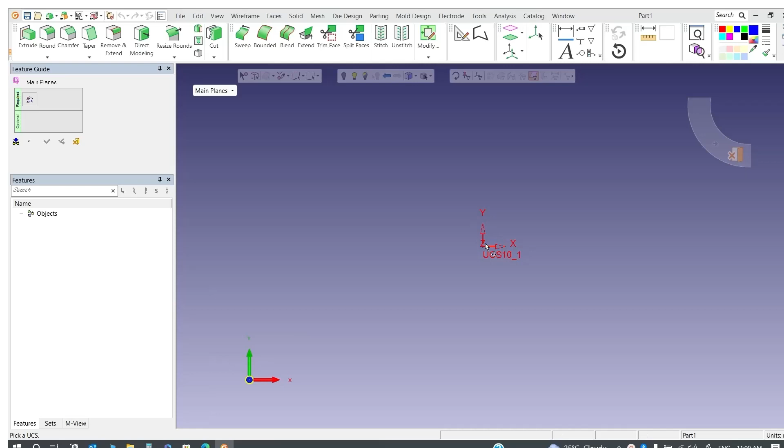So in plane, if you are creating plane, you have to create a main UCS. How will we create it? In wireframe, we have an option called main planes. While selecting the main planes, it asks to pick a UCS. We will select this default UCS, and you can create XYZ planes. Otherwise, if you want only the XY plane, you can select only that, or you can go for the default main planes. If you select OK, you will get the XYZ planes.

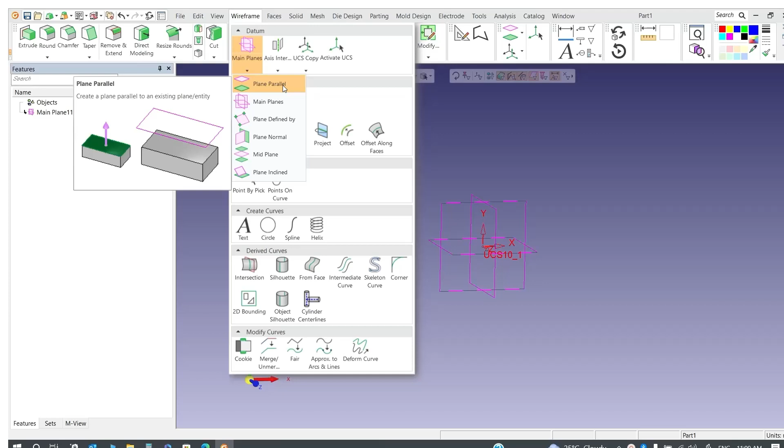The second one is plane parallel. If you want to create a plane parallel to a plane or surface, you can use this option. It asks you to pick the entity to define the plane. I will select this XY plane. Otherwise, if you have any solid object, you can select any face as well. Just select the plane, then it asks for the delta.

You can toggle this vector, and I will take this upside as 500. Now it's on one side. If you want to create on both sides, you can go for both sides. Here also you can give the dimensions. I'll reduce it to 200, so I will give 200 here.

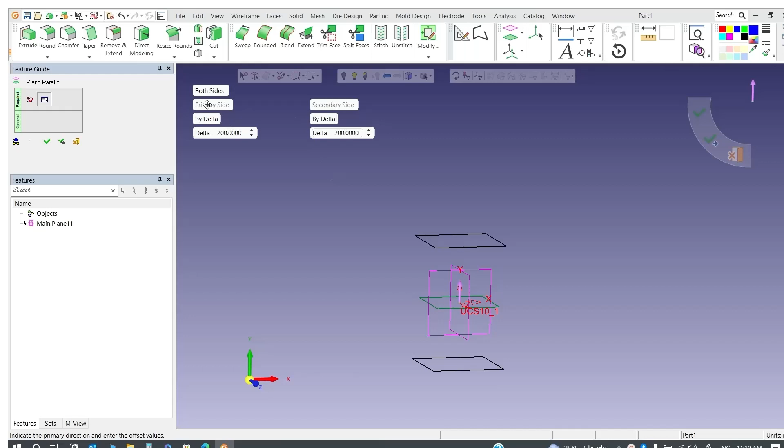The next option is, if you don't want a delta dimension but have a specific point, you can select by point instead of delta. There you can select the specific point, so the plane will be created at that particular point. That's how we can create a plane parallel.

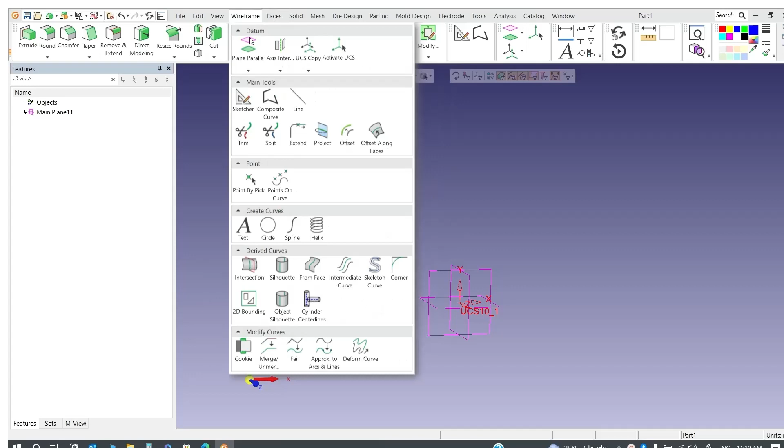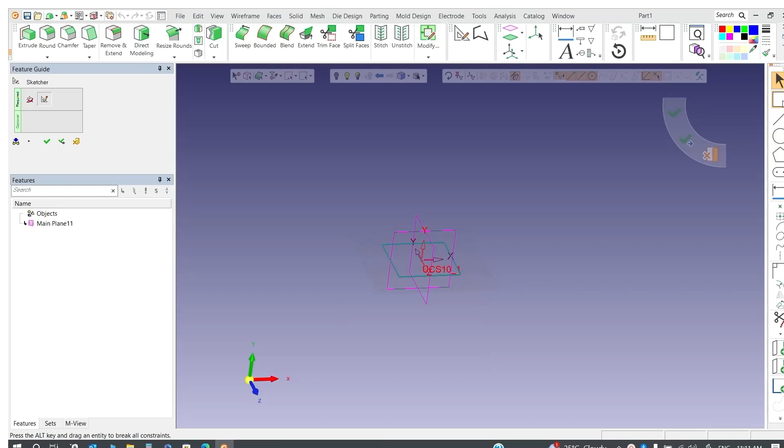The next one will be main plane, which we already discussed. The next is plane defined by points. For that purpose, I will create a solid object, then I will delete this main plane as well.

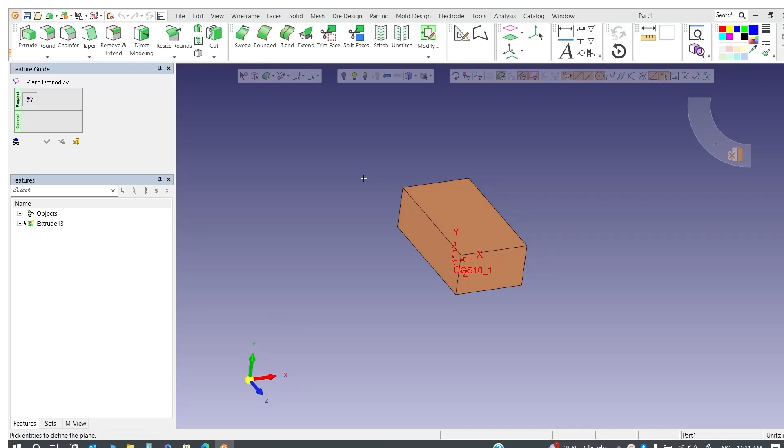Here you want to create a plane using 3 different points - plane defined by points. I will select the plane defined by; it asks for the entity to define the plane. I will select the first point, then this point, then this point. It will create a plane with respect to these 3 points.

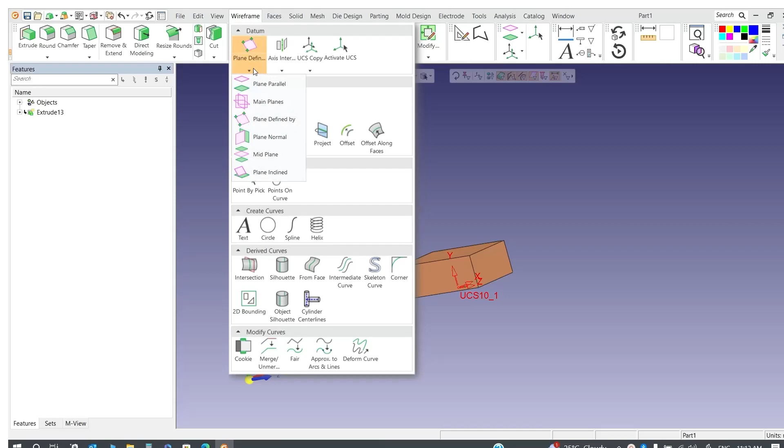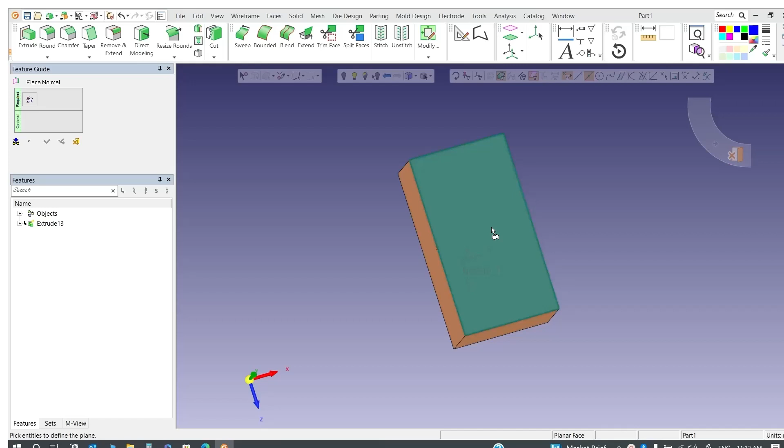Then plane normal - if you want to create a plane on these 2 points, the middle of this object, I select this face first, then it asks for 2 points. I will use this filter option to select the center point, so I'll select these 2 objects. You will get a plane horizontally, vertically, 90 degrees with this plane. That is plane normal.

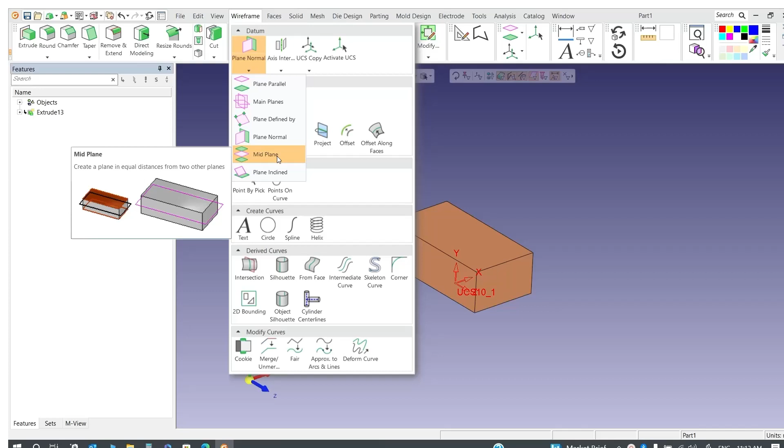The fifth one is mid plane. Mid plane means if you want to create a plane in the middle of 2 surfaces, I will select the first surface and second surface, and you can create a plane in the middle of these two surfaces. Like this, I will select these two planes and it will create a plane in the middle of the object - that's two different ones.

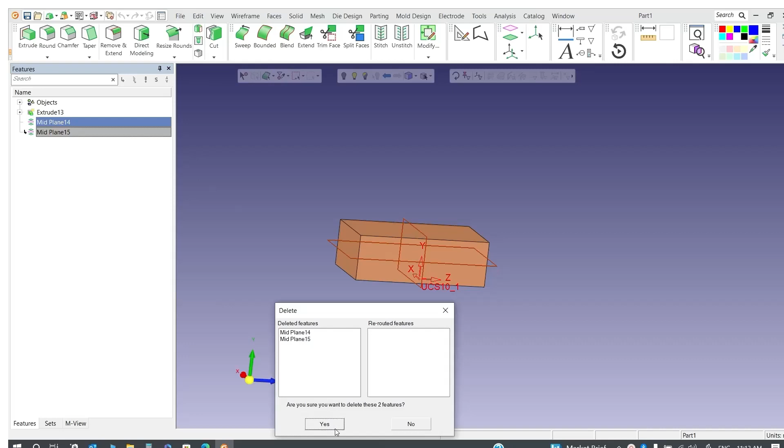These are the different types of plane creation in Cimatron.

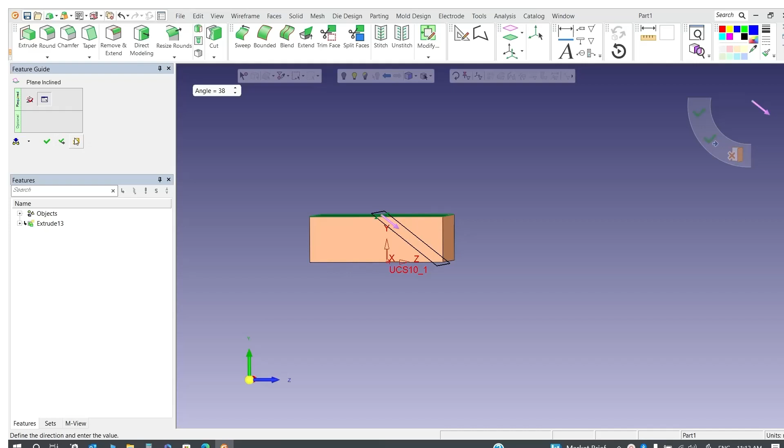Now we can see axis. There are 5 different types of axes available in Cimatron. The first one is axis intersection - if you want to create an axis with two different planes or objects, you can simply select two planes, and it will create an intersection UCS.

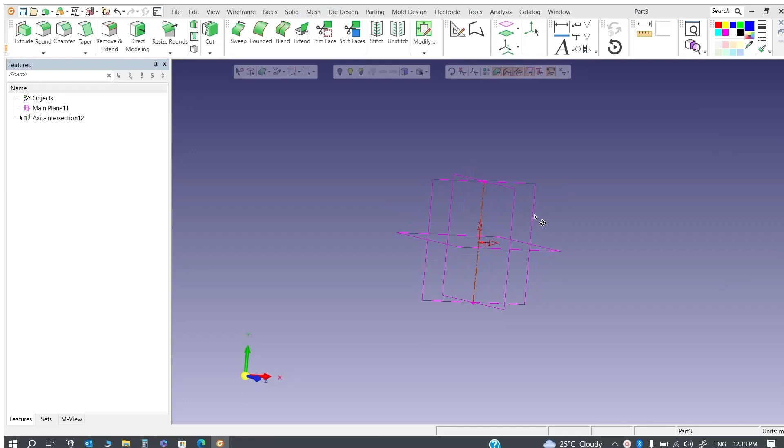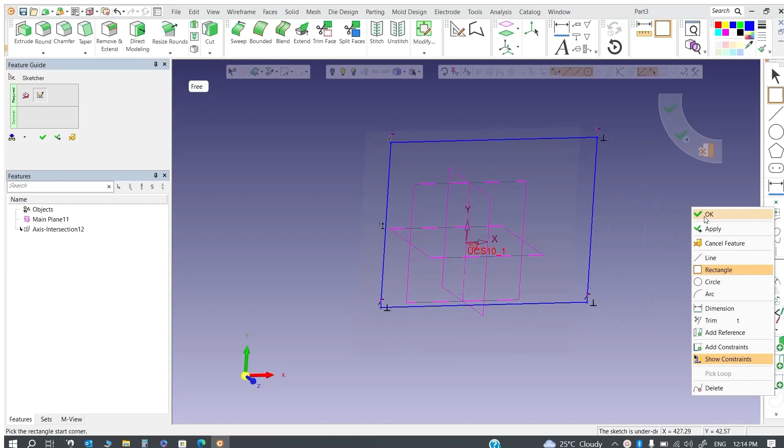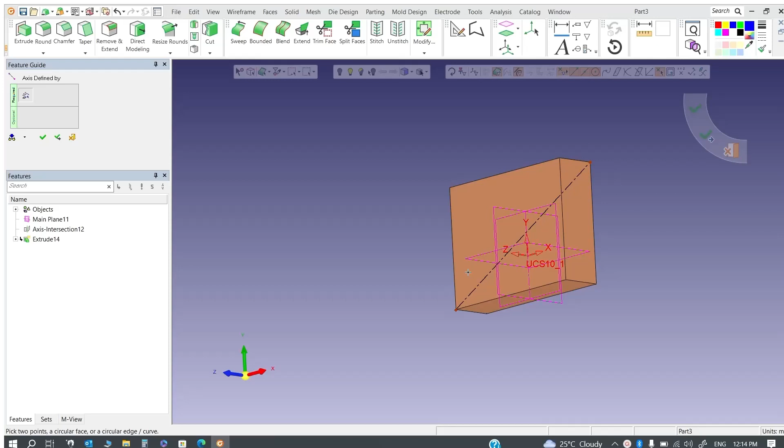The second one will be axis defined by 2 points. If you have two objects, or if you had 2 points, I will create 2 points now. If you have an object, otherwise I will create an object now, and extrude it. So in this object, if you want to create a UCS with these different points, just go for axis defined by 2 points and select these 2 points. It will create an axis connected to these different points.

The third one is axis normal. You can simply select any plane and any point, and with respect to the point and face, it will create an axis.

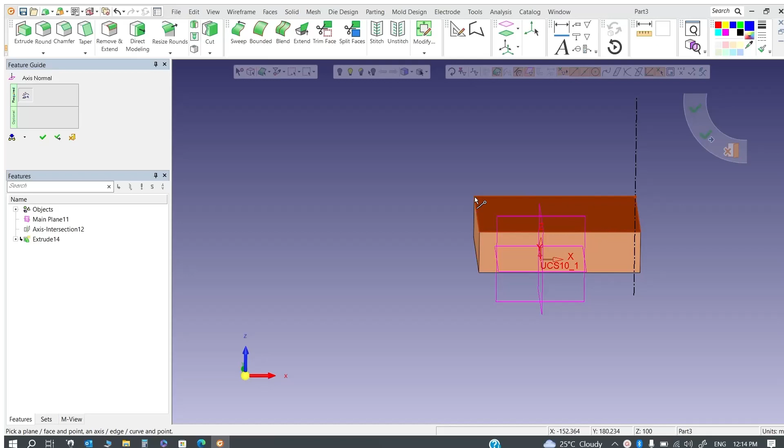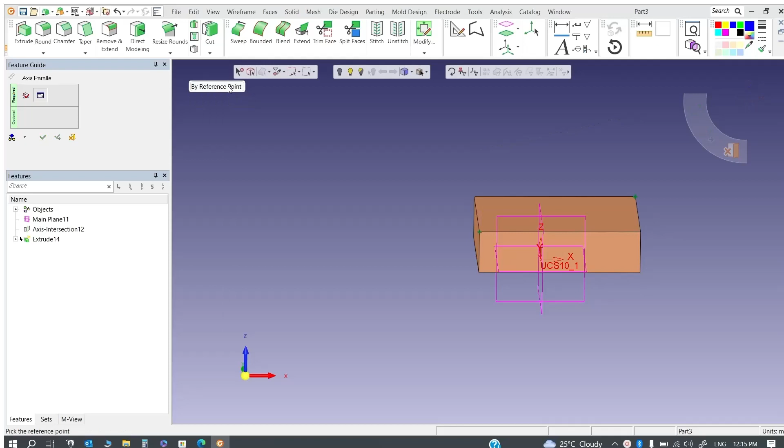The fourth one is parallel. If you want to create an axis parallel to two different points, you can mention delta over here - either by vector or by point - and with respect to this point it will create a UCS.

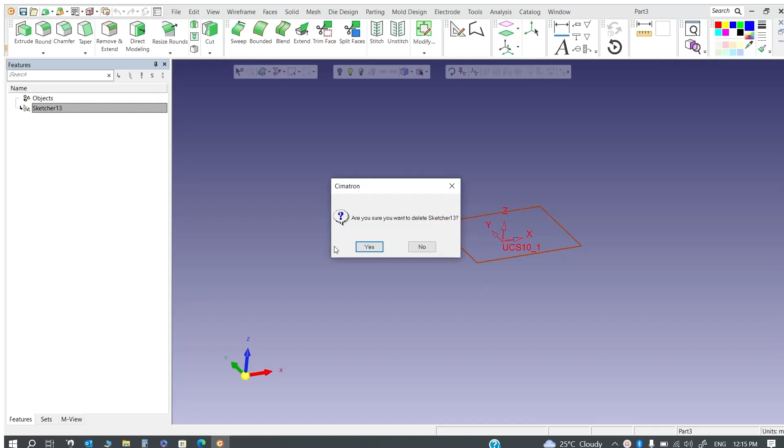The last one is main UCS. I will delete all this. Now, if you want to create a UCS axis, main axis, simply select that main axis and select the UCS. It will create a UCS, or you can select X, Y or Z, just like plane creation. These are the different types of axis.